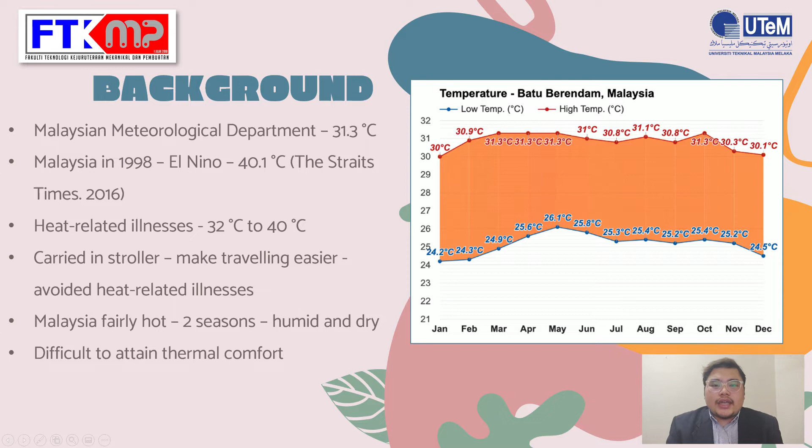Malaysia is one of the countries that is pretty hot because it has two seasons in a year, which are humid and dry. The temperature in Malaysia, on the other hand, might make it difficult for newborns to attain thermal comfort.

For the problem statement, we have two problem statements. The first one is that it causes heat stroke. Waller in 2021 said preventing a baby from direct sunlight by covering with light cotton might raise the danger of heat stroke. And second, for the ventilation system, using a fan when the ambient is too hot is unable to provide a comprehensive air supply to the infant in the stroller. It might just reach the upper body.

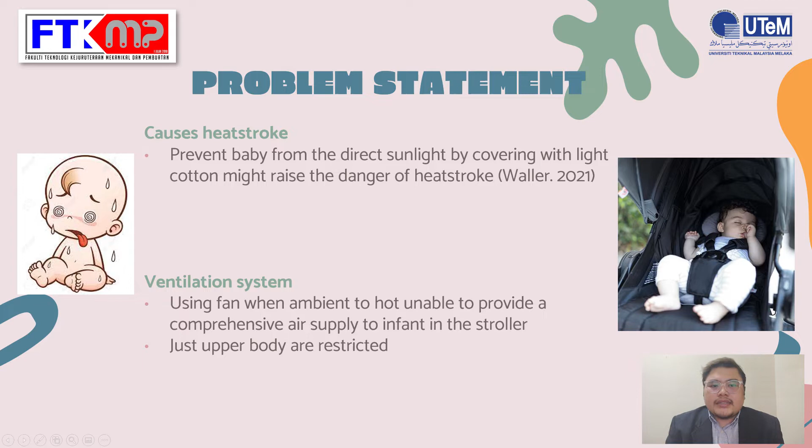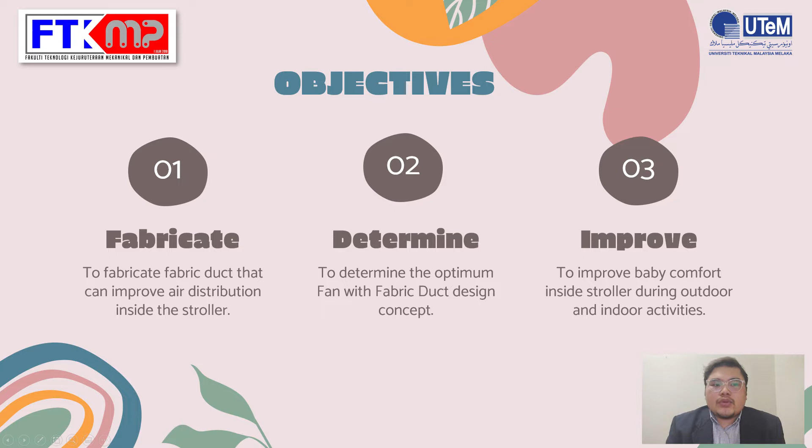Okay, for objectives, we have three objectives. The first one is to fabricate a fabric duct that can improve air distribution inside the stroller, then to determine the optimum fan with fabric duct design concept. And the last one is to improve baby comfort inside the stroller during outdoor and indoor activities.

Then there are three scopes of the research. The first one is power supply. The fabricated fan with fabric duct is only available depending on battery power bank lifetime usage. Second, position. The static stroller is the subject of the fabrication, both outdoor and indoor. The last one is efficiency. The high ambient temperature or the infant metabolic heat rate may have an impact on cooling efficiency.

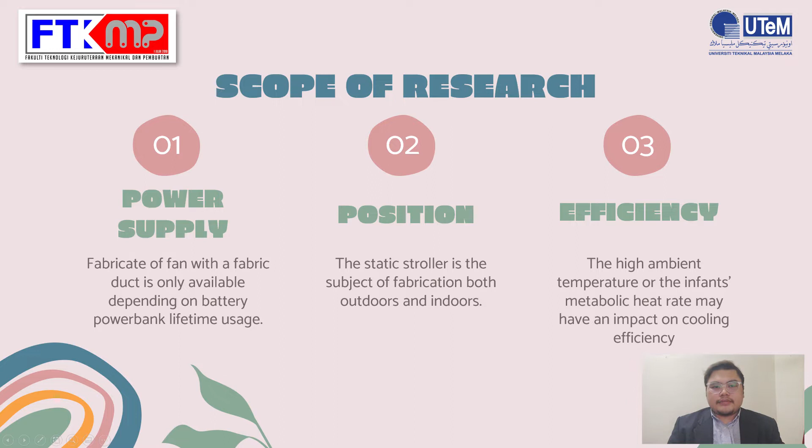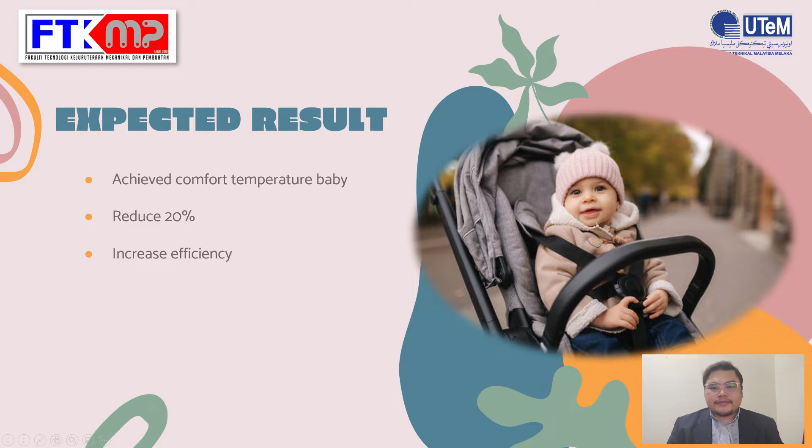This project is expected to achieve a comfortable temperature for the baby in the baby stroller by reducing the temperature by 20% and can increase efficiency. Okay, for the literature review, the first one is thermal comfort.

By Olesen and Brager in 2004, thermal comfort is a subjective reaction or state of mind in which a person displays contentment with his surroundings. In 2013, ASHRAE stated thermal comfort is a state of mind that communicates happiness with the thermal environment. In 2017, ASHRAE said thermal comfort is a person's psychological state of mind, whether they feel neither too hot nor too cold, or thermally neutral, as long as they are healthy and wearing a typical quantity of clothes at the time of evaluation.

By Al-Rashidi in 2011, A Burris in 2014, and Parsons in 2003, the human response to temperature is mostly governed by 6 factors, which are air temperature, humidity, air velocity, and radiation. These are 4 key environmental variables. On the other hand, the metabolic rate and the thermal insulation of clothes are two sorts of personal characteristics.

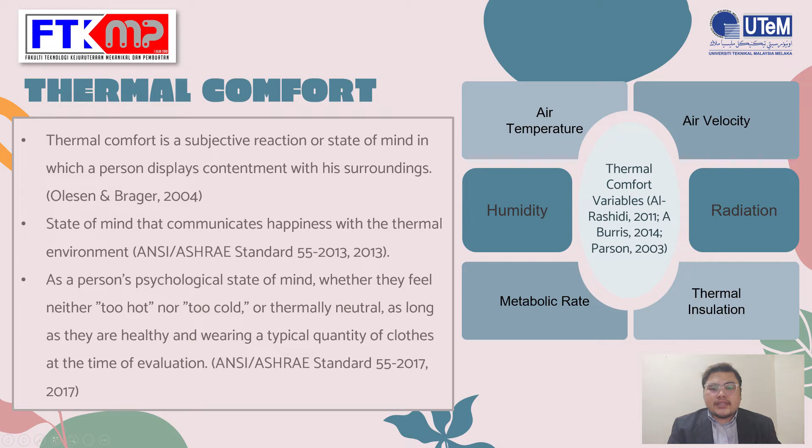The thermal environment refers to the things that might impact heat transport at that point or when riding in a wheelchair or stroller. According to Kurazumi and friends in 2021, babies and adults with physical disabilities have poorer thermal adaptation to the environment than healthy adults. They are unable to regulate their body temperature and can easily suffer from heat illnesses.

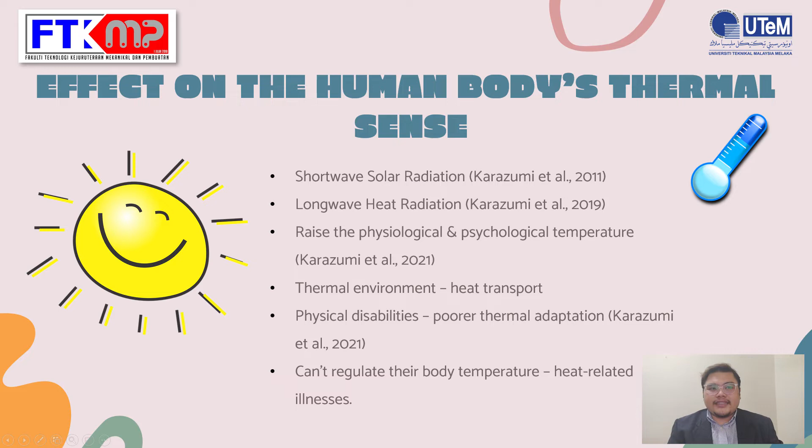For body surface area, Kurazumi and friends used a thermal mannequin rather than an infant to know the effect of the thermal environment in 2021. It is because infants cannot notify their parents about their discomfort. In general, infants easily heat up and cool in their environment. The body surface area of an infant is extremely small compared to an adult. As a result, heat transfer is critical to maintain the baby's body temperature.

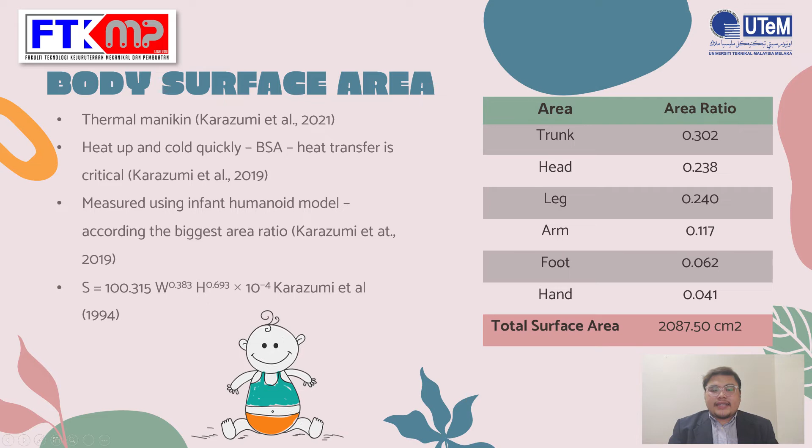In 2019, Kurazumi and friends conducted research to evaluate the thermal environment for an infant by measuring the surface area of each area of newborn bodies. The formula for body surface area is used from Kurazumi and friends from 1994, which is 100.315 times weight to the power of 0.383 times height to the power of 0.693 times 10 to the power of negative 4.

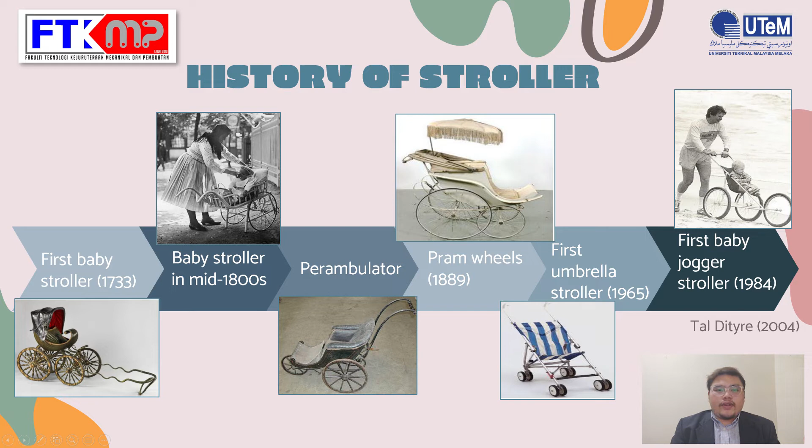Those figures are the history of strollers that I've been studying from Tal Dityre in 2004. In the past, the traditional baby stroller served only a few basic functions, such as allowing the entire family to go for a walk or even run. However, most baby stroller designs have been improved in recent years with numerous new features such as comfort, lightweight structure, ergonomics, and improved ventilation systems.

Okay, the ventilation system in the baby stroller is very important. Ducting is one of the types of airflow that can be used in today's world, and the system can distribute the proper quantity of temperature air to each room in the house. On the other hand, fabric ducting or textile ventilation is a type of air duct made of polyester material that comes in a variety of shapes, as shown in the figure.

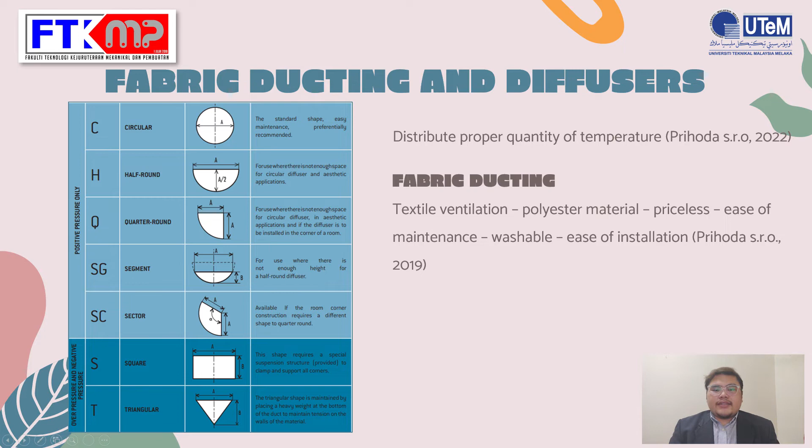Fabric ducting is the best option for the baby safety, and according to the previous work, fabric ducts are priceless and ease of maintenance. These ducts are removable and can also be washable. This fabric ducting system also saves time and money in terms of installation and access.

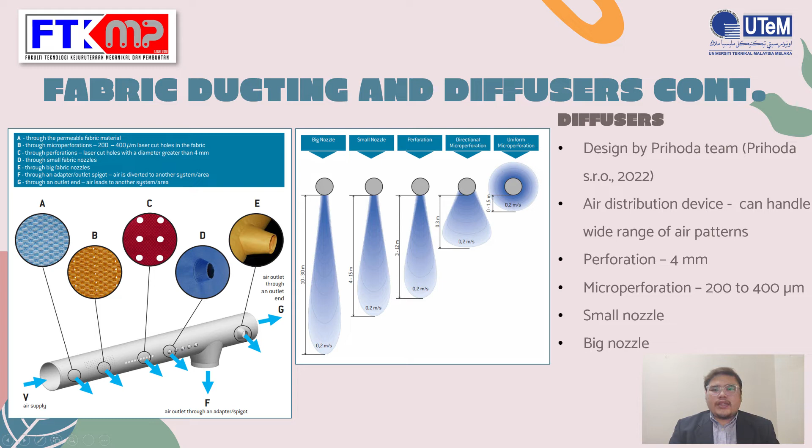Then for the diffuser, it was designed by the Prihoda team in many ways as shown in the first figure. The diffuser is a versatile air distribution device that can handle a wide range of air patterns. As you can see, B is a micro perforation, small holes with a diameter of 200 to 400 micrometer, and C is a perforation with a 4 millimeter diameter. D is a small nozzle and E is a big nozzle. The other figures show the range of airflow distance for every diffuser.

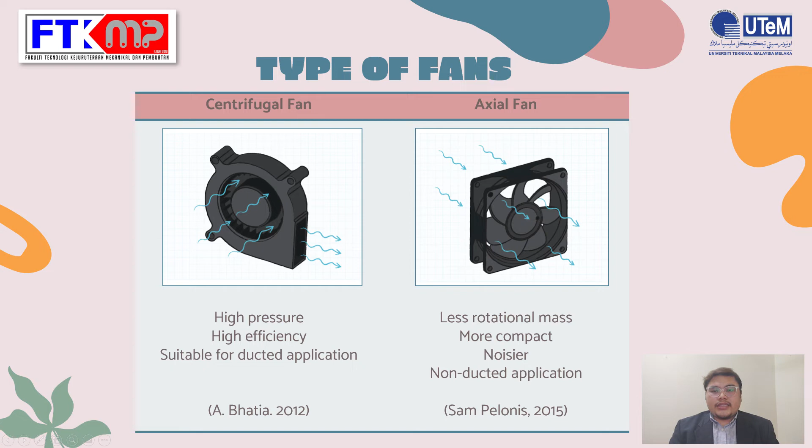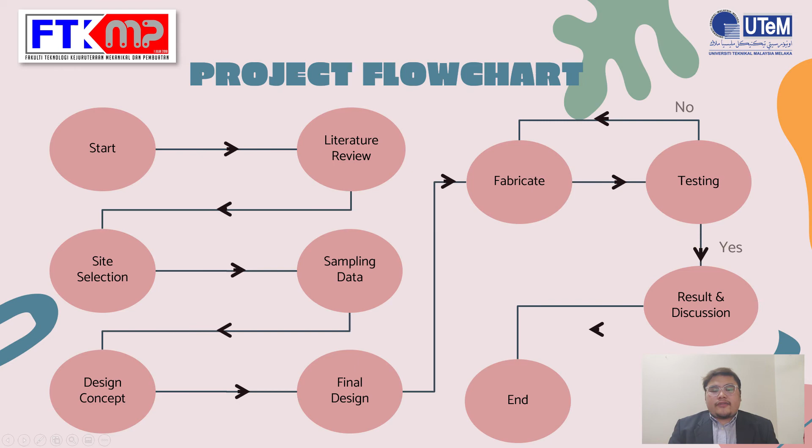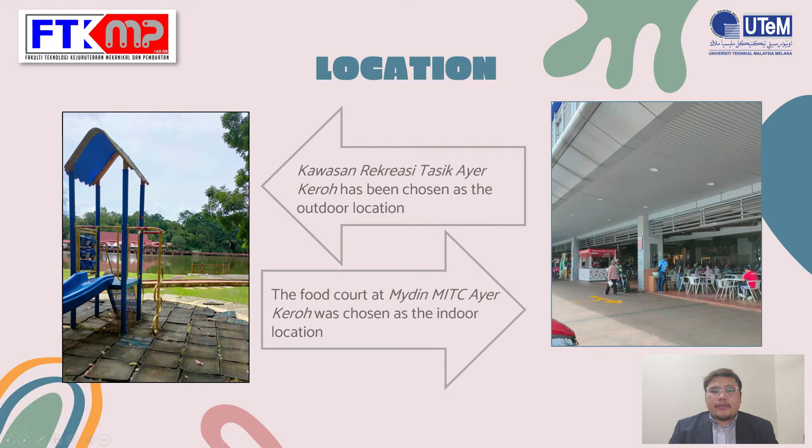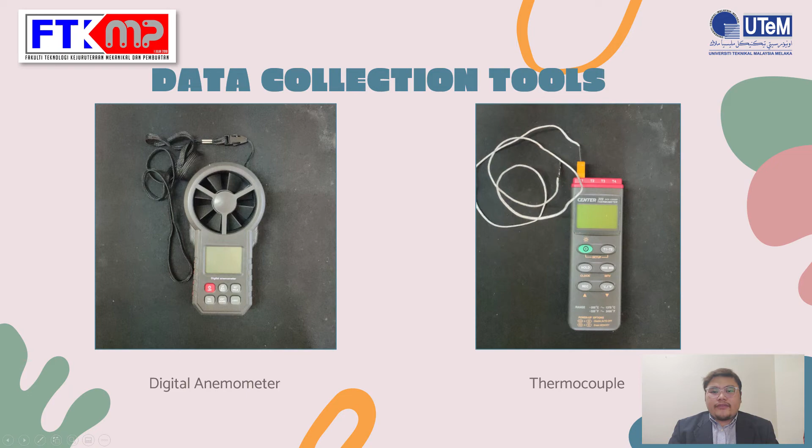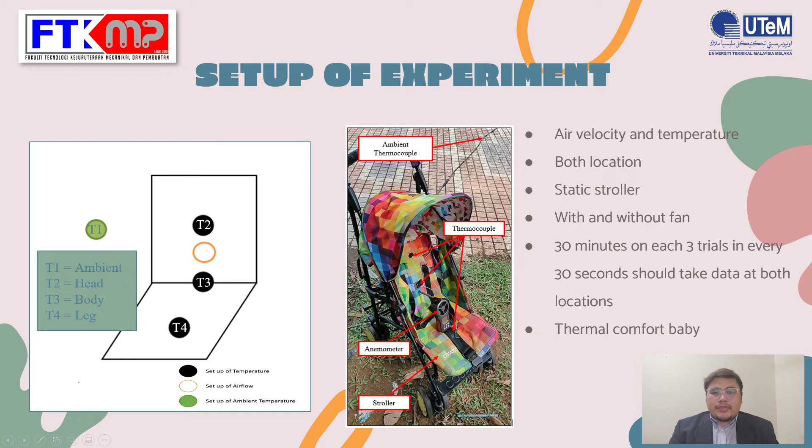This test should be conducted both inside and outside of the specific location with the stroller in static condition. Furthermore, data will be collected both with and without the fan installed. Data should be taken every 30 seconds for 30 minutes on each trial. By obtaining the data of this experiment, the thermal comfort of the baby can be known. Those figures show a design concept.

For concept design A, this fabric duct is attached to the top of the baby stroller canopy using magnets on both ends, and a clip in the center to prevent it from moving and falling. A fan is also attached to the center of the fabric duct in semicircle form in the design. On design A, the diffuser will be perforation. A pipe clamp will be utilized to connect the fan casing and the fabric duct in the middle of the top.

Concept design B has a round shaped fabric duct and a perforation type diffuser. This round shaped fabric duct will be fastened to both sides of the stroller shaft with a velcro mechanism, and each fabric duct will include a fan. A switch will link the two fans, which will be mounted on the baby stroller handle. Pipe clamp will be used on the top of the fabric duct to keep air from leaving the fabric duct chamber.

Design concept C will be connected to the seat base and has a round shape. Rope or strap as well as clip will be used to secure the fabric duct on the seat base from sliding. The diffuser in this concept will be directed micro perforation. The fan will be attached to the top fabric duct in the middle. Pipe clamp will also be used to tighten the connection between the fan casing and the end of the fabric duct.

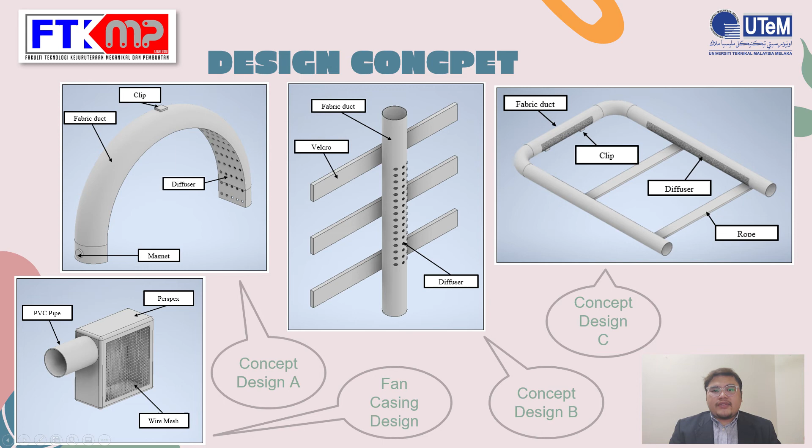Lastly is the preliminary finding. The first one is concept selection. To find the best concept, a concept screening matrix or Pugh method will be used. Those 5 criteria will be used for the concept screening. The highest ranked should be compared using a concept scoring matrix to determine which is the best concept idea. To build this project, the concept scoring matrix will be used to weight each selection criterion to discover the most relevant aspect of the project.

The rank may also be determined using the concept scoring matrix by computing the weighted score, which is weight times rating. According to the concept scoring matrix table, the best design is design B, which was selected from 2 designs, and design B will be selected to continue this project.

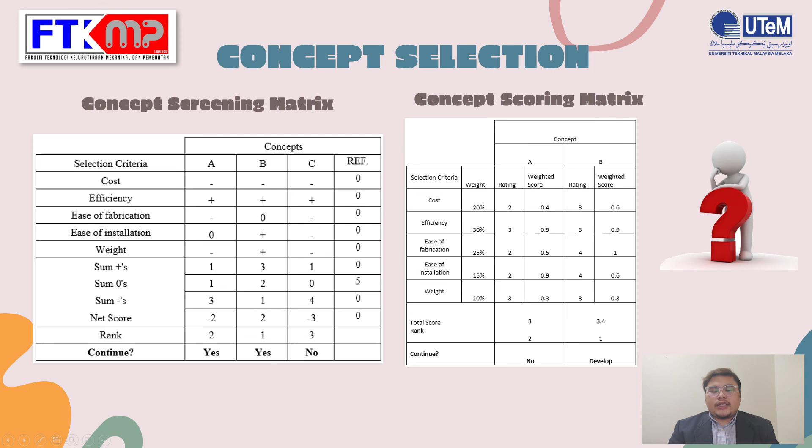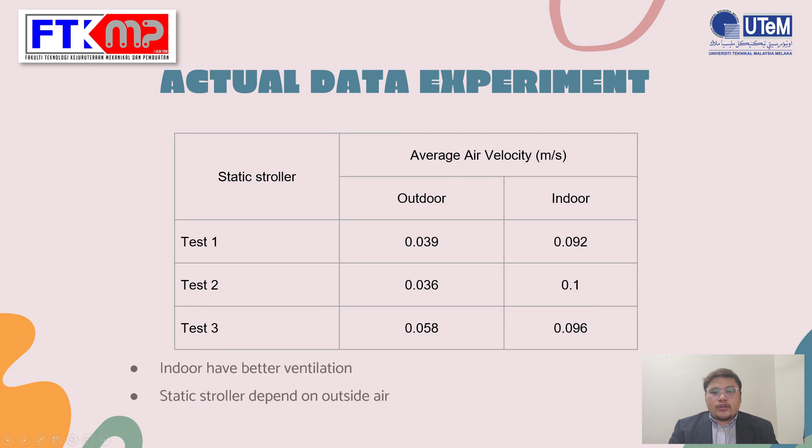Then the data for the actual experiment. This is a table for average air velocity. As you can see, indoor has better ventilation than outdoor because it is a static stroller. It depends on the outside air. Lastly, the table shows the average temperature. From the actual experiment data, the outdoor gives more heat than indoor. The highest temperature taken is from the body, which is T3.

The temperature in each part cannot match the baby's comfort temperature, which is between 20 to 22.2 degrees Celsius, based on the data collected. The resulting temperature data also exceed 32.2 degrees Celsius. At this temperature, the infant must not be left outside for lengthy periods of time, even indoors. The baby will be uncomfortable and may suffer from heat-related disease.

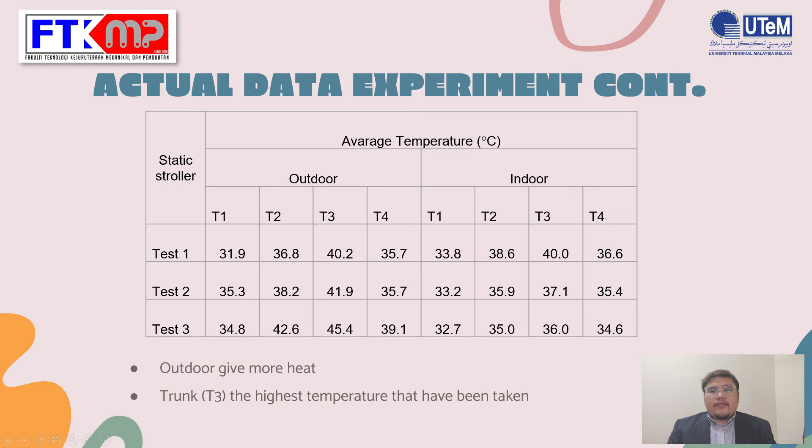The air that enters the baby stroller solely depends on the outside air that blows toward the infant, and this air also depends on the daily weather, according to the result of air velocity with the static baby stroller condition. Okay, that's all from me for PSM1.